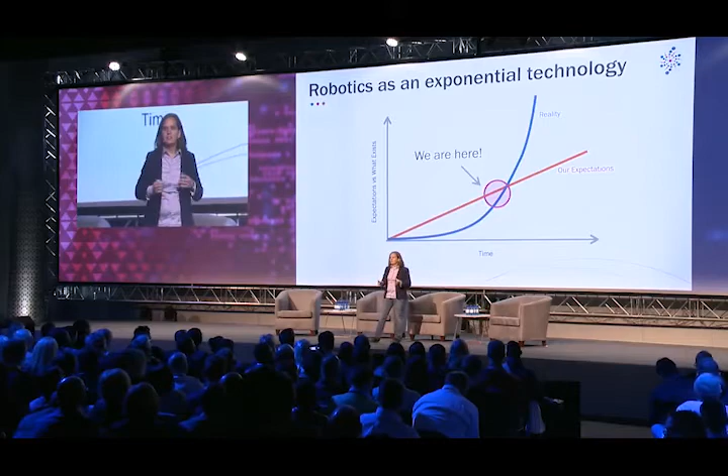But I think one of the interesting things right now is that the robots of reality are starting to get to the point where they have similar capabilities to the robots of our imagination.

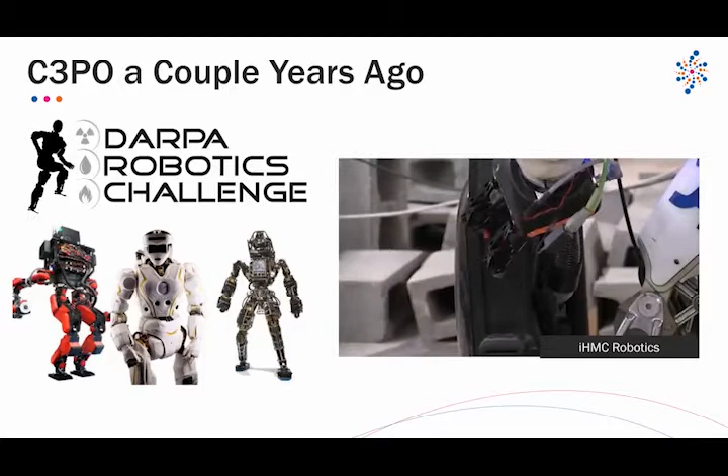And what you see in this video is a robot effectively doing household chores. The video is sped up, the robot was a lot slower than this. But it's really not doing anything more complex than I am convinced my 4-year-old can do, although she doesn't do it. So these are the kind of things that robots are at this toddler level.

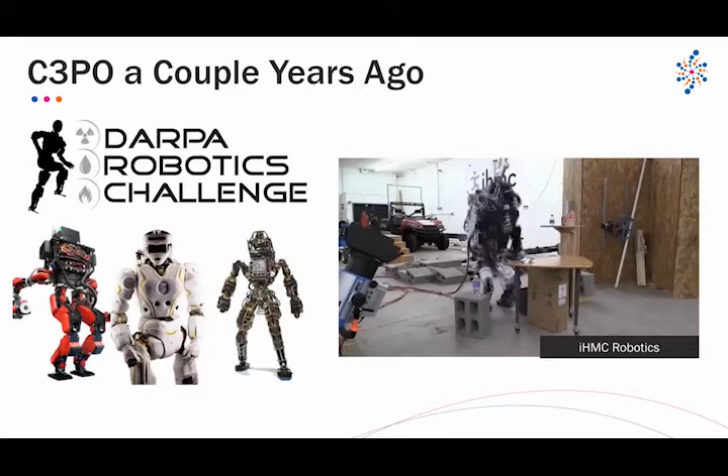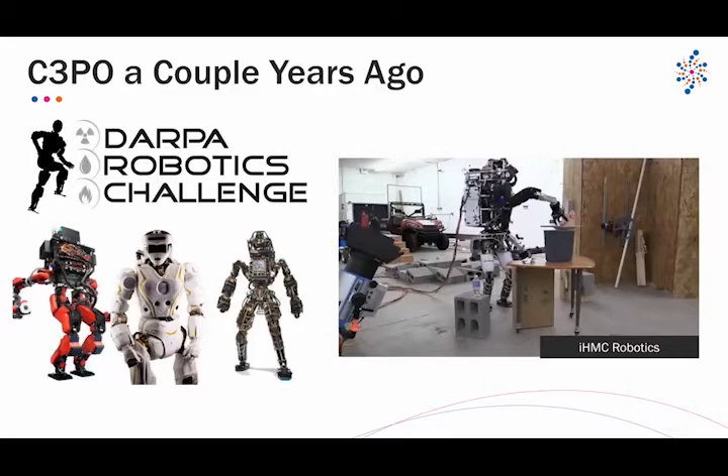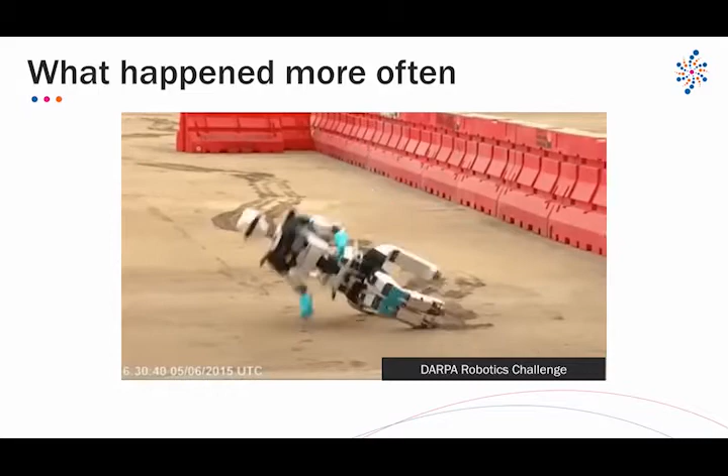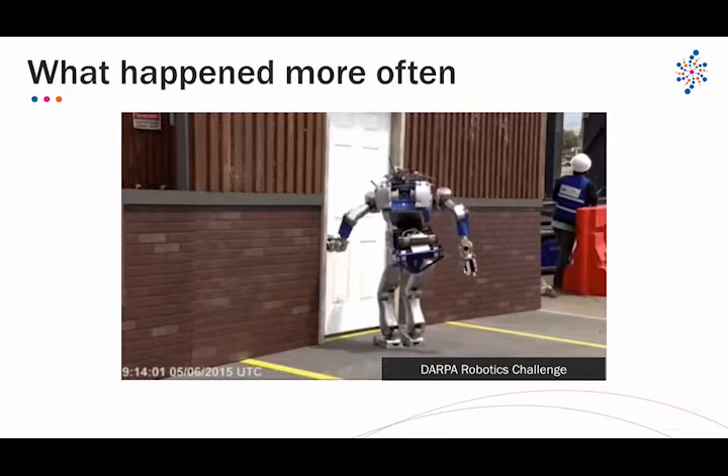Interestingly, when you got to the competition finals in summer 2015, what you saw more were things like this - this is really what you see a lot in robotics reality. It's like my 2-year-old, who oftentimes will be running and crash. This happened a lot in this competition, and there's a lot of technical reasons for that. One thing I want to make very clear: all of the robots you see on YouTube doing really cool things - there are at least hours of footage of them doing stuff like this.

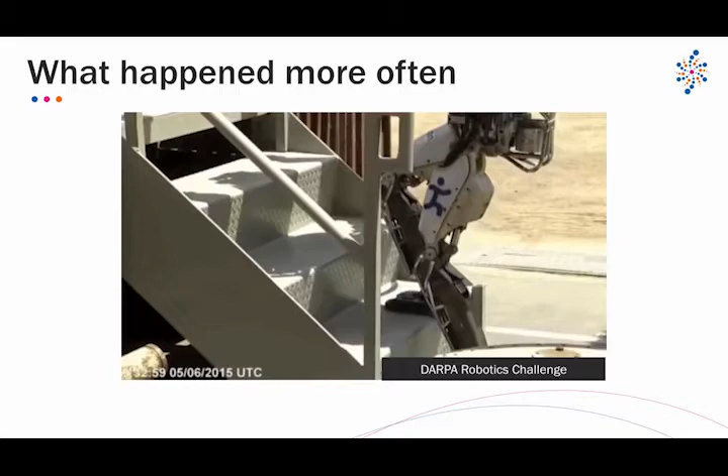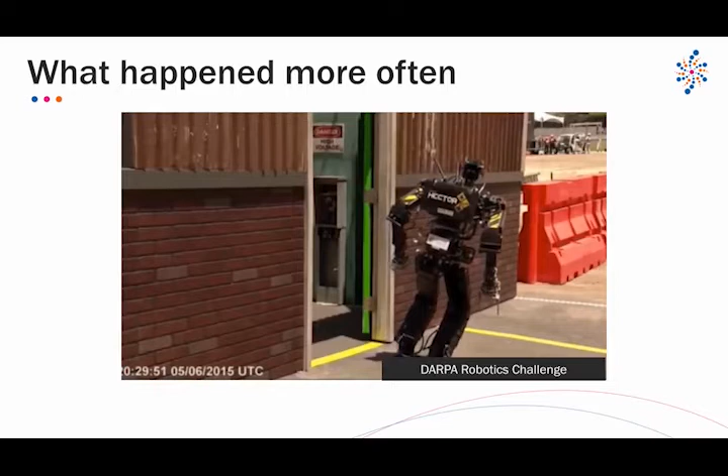Unless there's been painstaking tuning or it's stated otherwise, this happens a lot in robotics - usually when your advisor is looking over your shoulder for a demo.

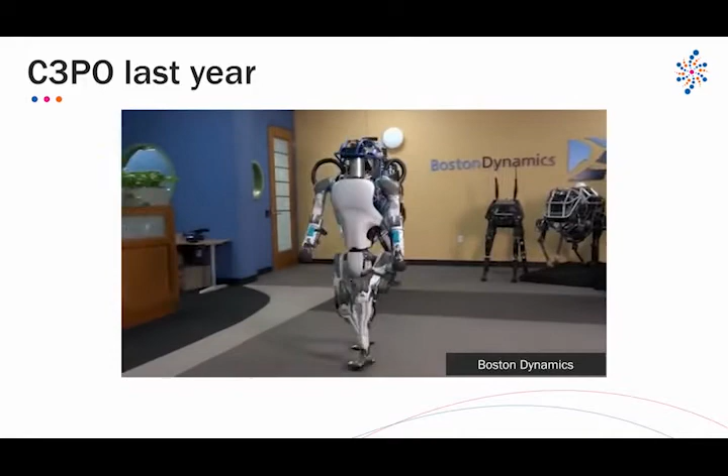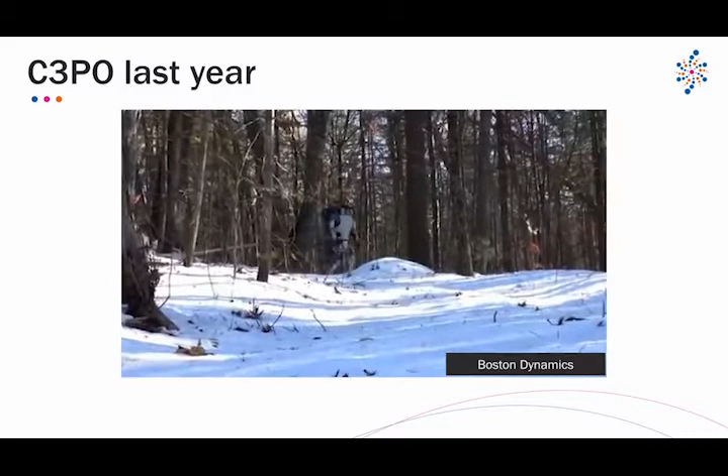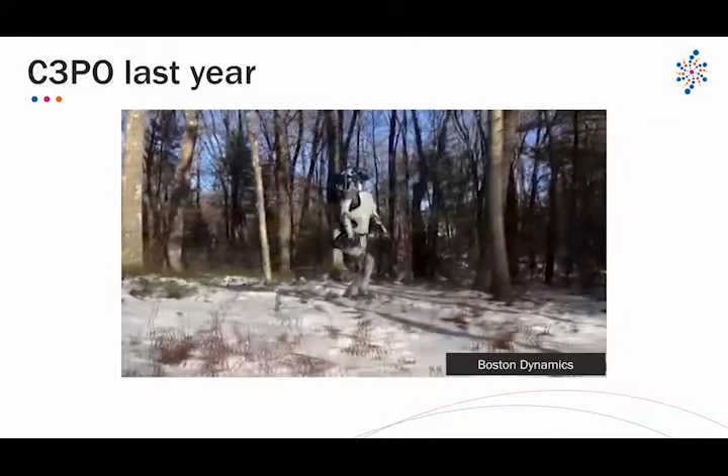Just last year, Boston Dynamics came out with a new version of Atlas that looks like this. One of the things you notice right away with this robot is it moves faster, it's much more robust to its environment - it's walking through snow here. Some of you have probably seen the Big Dog videos from the same company; this is the same basic idea. This was enabled through a lot of technical developments, including things like 3D printing, which doesn't seem immediately connected, but is very connected to this.

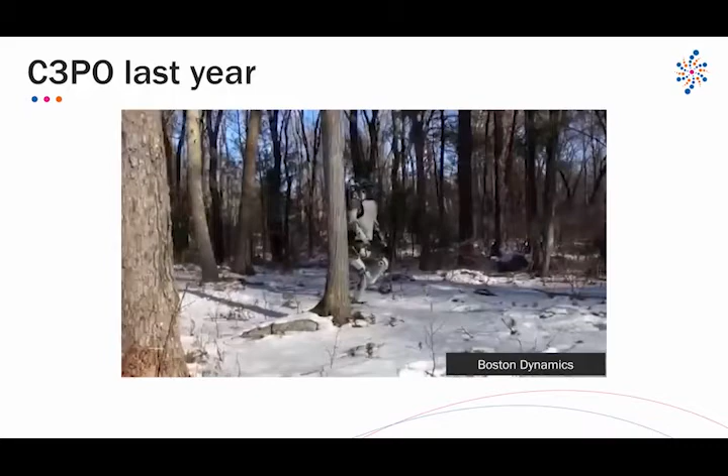Finally, just a couple months ago, it was announced that SoftBank is buying Boston Dynamics from Alphabet. SoftBank is responsible for the Pepper robot and the Nao robot. These are very social - SoftBank's robots are designed to be very social. I'm really interested to see what happens when you combine the physical capabilities of something like Atlas with the more social capabilities of something like Pepper. I think that's ultimately the interesting direction SoftBank wants to go.

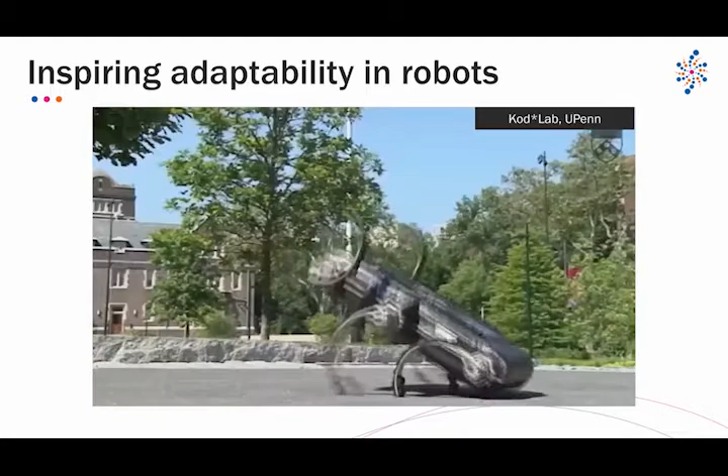So this is RHex out of University of Pennsylvania in Dan Koditschek's lab, and it was actually inspired by the way that cockroaches run. It does a pretty good job of getting through this kind of park environment - it can run through gravel, run through sand, and do a lot of pretty impressive things, including jumping around.

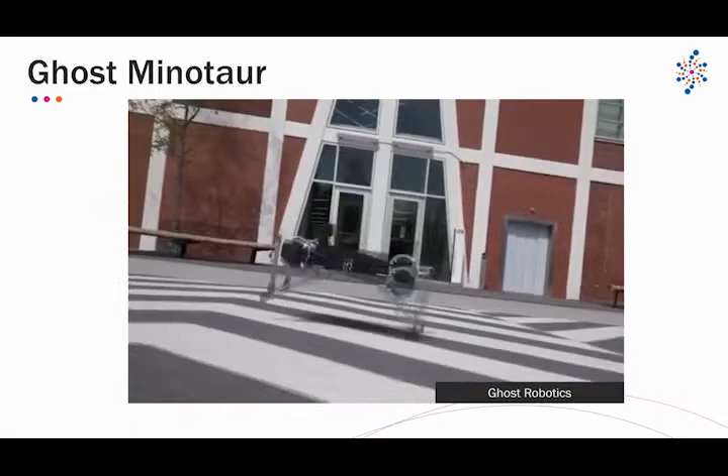So this basic idea is spun into a commercial enterprise called Ghost Robotics, and they do a lot. One of the things I didn't mention about RHex is a lot of that was due to the compliance of the legs - just making the legs a little springy is what enabled it to do all of that impressive stuff.

So with Ghost Robotics, if you have $10,000 to spend, you can really prank your office mate by having this guy walk into the door. It costs about $10K, but it's a pretty impressive robot.

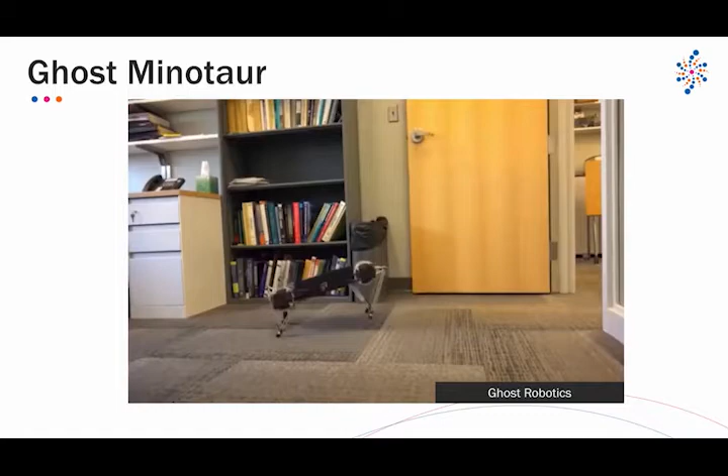So a lot of what enables the Ghost Robotics robot is new developments in motors. I wanted to show this in part because this motor development happened because Sangbae Kim, whose arm you see in this picture, was trying to make a robot cheetah.

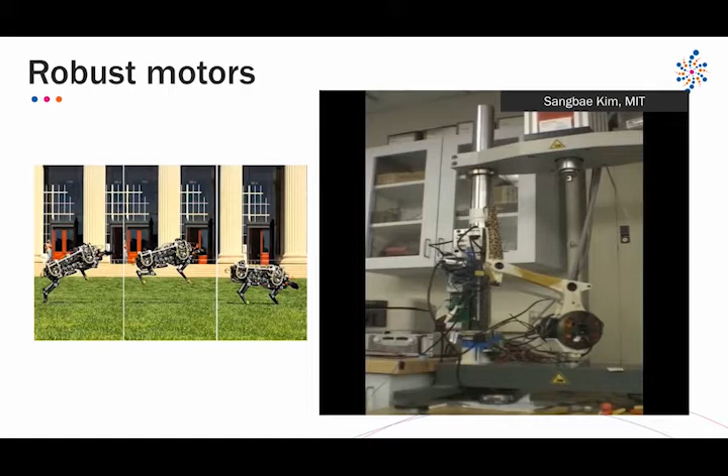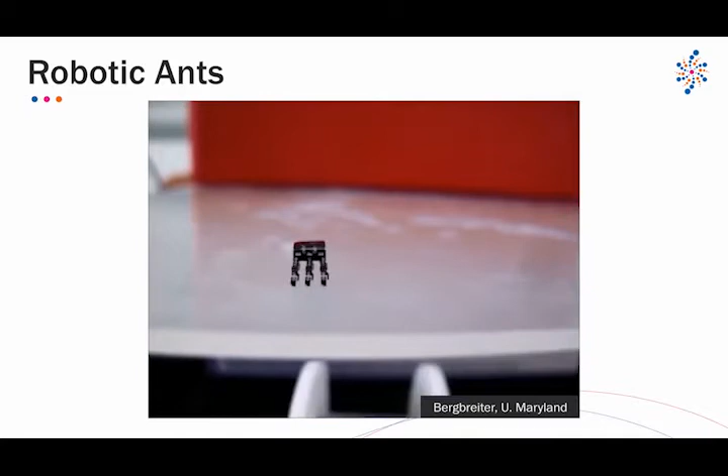Another way to become adaptable is to become very small. Ants and spiders are everywhere in the world, insects are ubiquitous. This is from my own work - a real ant and a real robot, though it's a particularly large ant, a bullet ant from South America. The robot itself is pretty small too, about 5 millimeters on a side. One of the things we're doing is studying how to locomote when very small, as well as integration problems of combining motors, sensors and mechanisms at these small size scales. This can ultimately have a lot of impact in things like healthcare.

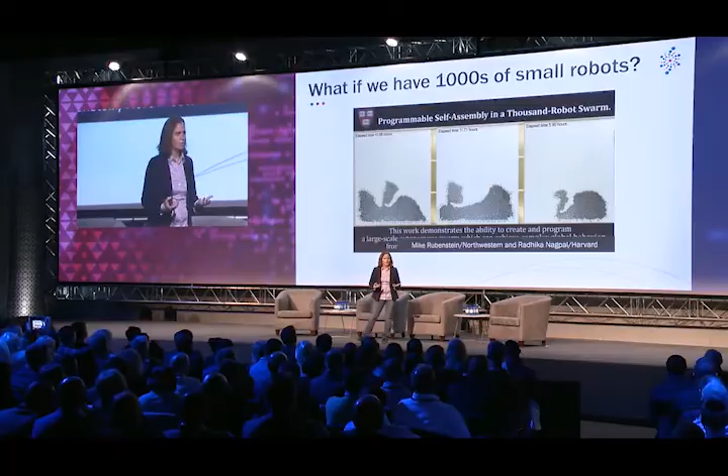Then you have the other idea: if I have a lot of small, simple robots, but I have 1,000 of them, this came from Radhika Nagpal's lab at Harvard, I can make them incredibly adaptable by making them into any shape I want. In this case I have literally 1,024 robots, called kilobots, creating these shapes based on different algorithms defined on each robot. It's pretty impressive what you can do with a lot of small, simple things in terms of adaptability.

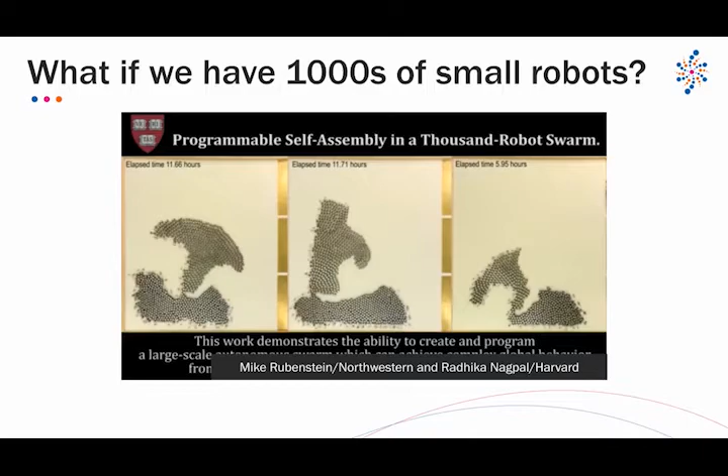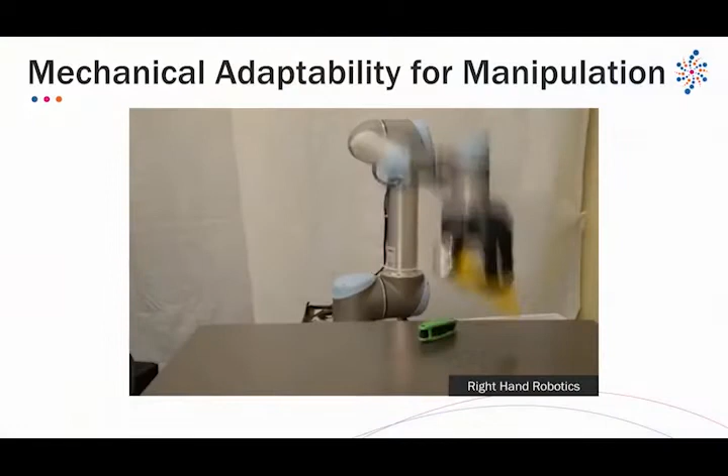In addition to locomotion and being able to get around your environment, adaptability is also incredibly important in things like logistics applications and manufacturing.

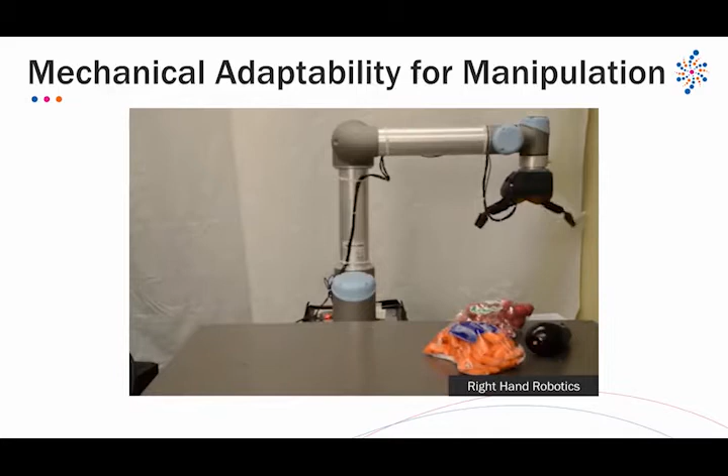This is a company where I have a friend, Right Hand Robotics, where they're actually designing a robot hand. Robot hands traditionally, unless I know exactly what my part looks like, have a lot of trouble picking up a part, especially if it's squishy or soft. In this case, what they've designed is this very compliant robot hand.

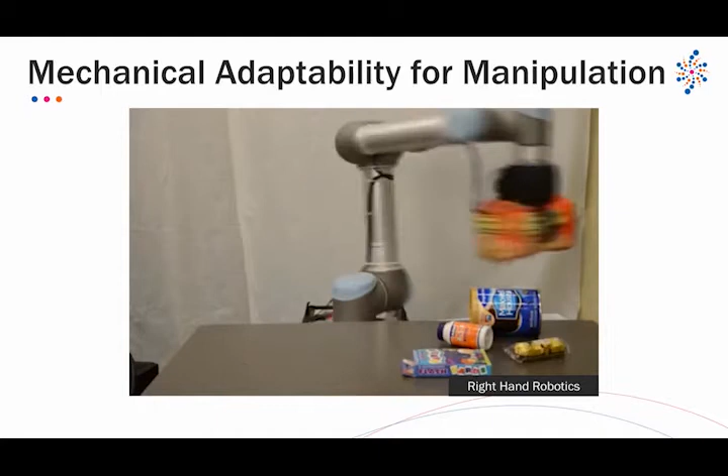Much like the legs and things like RHex and the ant you saw earlier, it's able to conform to whatever shape it's picking up, a lot like we do with our own hands. But we have a lot of muscles that enable that, so we can make hands much more capable than they've been in the past.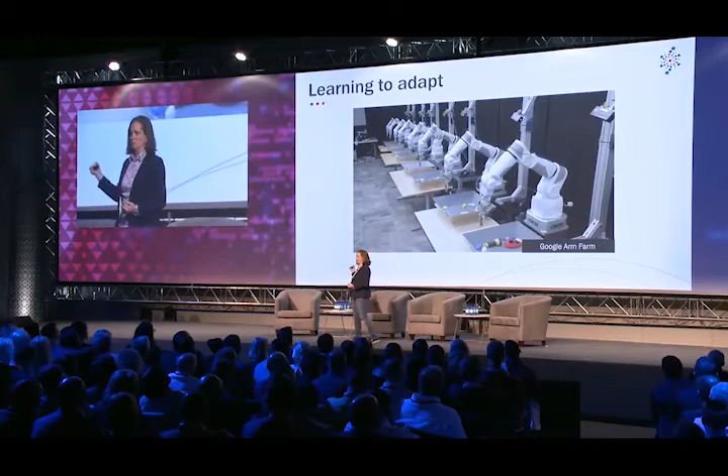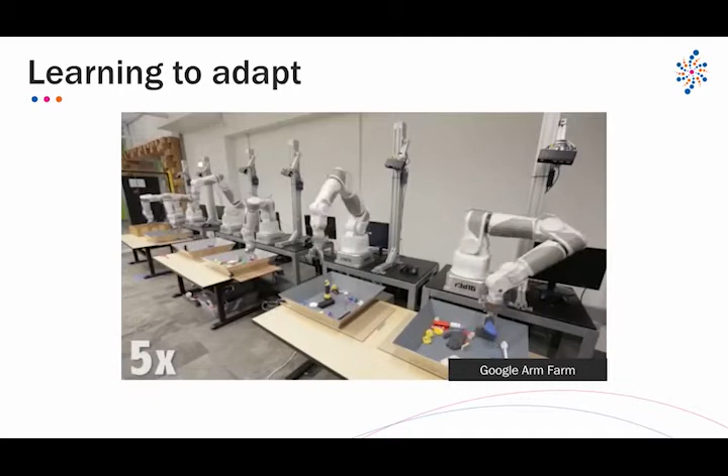We can also do things like incorporate AI and learning networks. This is a room at Google in California where they have just a boatload of robot arms continually trying to pick up objects and determining, was I successful, did I pick it up or not, and changing the strategy a bit each time. Based on this, I can learn good strategies that work even with very simple grippers.

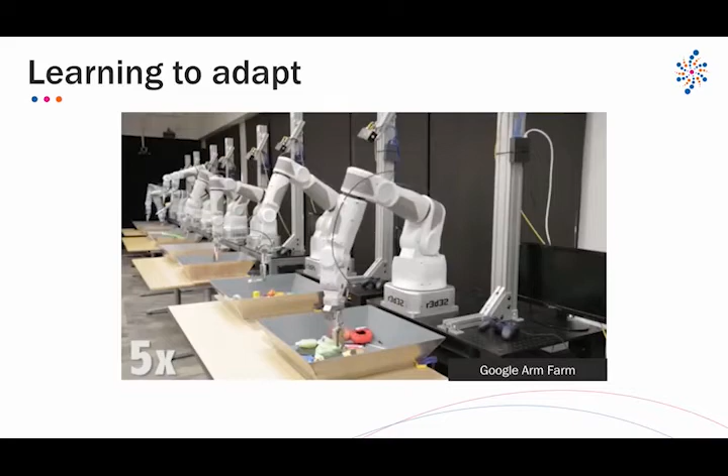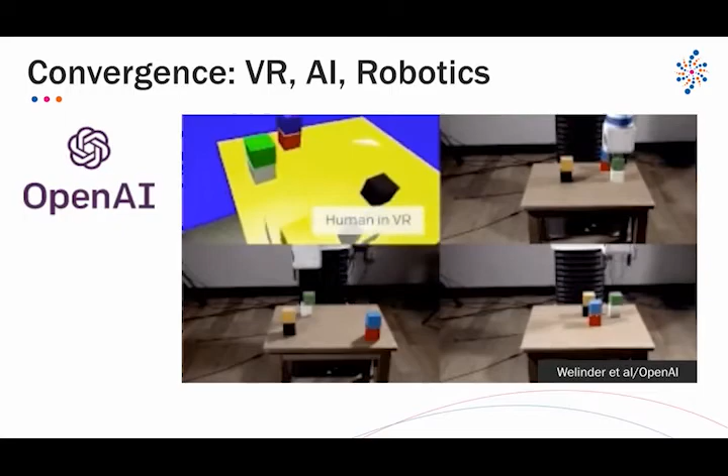This is one of my favorite new things. This happened about in May, a couple months ago, from the OpenAI project that Elon Musk has a lot of input into. In this case, what they were trying to do is take a human in virtual reality with one episode of training on a task - a very simple task, just stacking blocks. Based on that one episode in virtual reality, they had a robot learn how to do the same task regardless of where the blocks were originally.